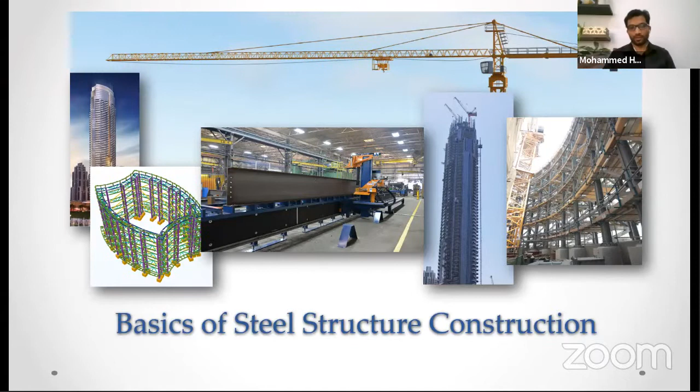You know what it is, steel, what steel structure is. Any steel structure which uses its structural components as steel to carry the loads, and for the structural stability, we call it a steel structure. You might have noticed many steel structures across.

Nowadays it's getting more popular because of its many advantages. The construction is very fast and it's prefabricated. Most of the steel structures are now prefabricated. All the structural elements are fabricated in a factory and taken to site and connected together. Because of that, the construction is very fast, the quality is good, and it has very less environmental impact. Because of all these things, the steel structure is getting more popular and more in use.

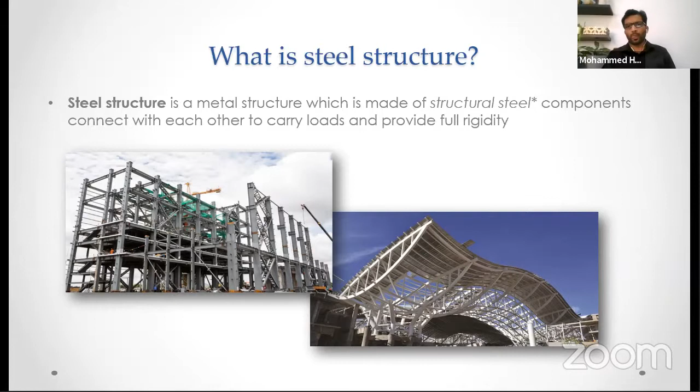When you see about steel structures, there are many applications. It is used in offshore structures for offshore towers, and it's used in onshore structures for many uses. In this session, we'll discuss the onshore structure construction.

Based on its application, it can be classified into industrial structures, tower crowns, bridges, hangars, warehouses, modular structures, and residential buildings. Tower crowns are those coming on top of the tower, which will be an architectural feature, and it will be used to cover the MEPs and other work items on top of the tower.

When you see bridges, hangars, warehouses, modular structures are very relevant to the current scenario. With this pandemic going on, modular structures are very widely used to build structures in a very fast manner. Modular hospitals are being made, modular quarantine camps are being fabricated, modular clinics, stuff like that.

Modular structures means those fabricated, assembled, everything will be ready at the factory and it will be taken to site and just placed in position. Because of that, when you need a very fast construction, modular structures are very common in use.

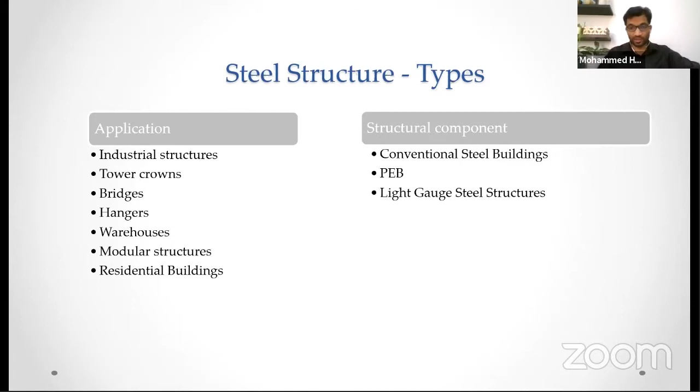Conventional steel buildings are those in which the structural members are made from standard sections. Each country has its own standard sections. In India, we have ISMB, ISMC; in America, there is W sections; in Europe, they use IPE, HEA, HEB; and in British standards, it's UB, UC sections - universal beam sections, universal column sections. These are a wide range of standard sections available in a particular market with specific dimensions, which remain the same wherever you get the structure or element.

So this way of construction is the conventional way, because it was used as a conventional way of structure where standard sections will be used.

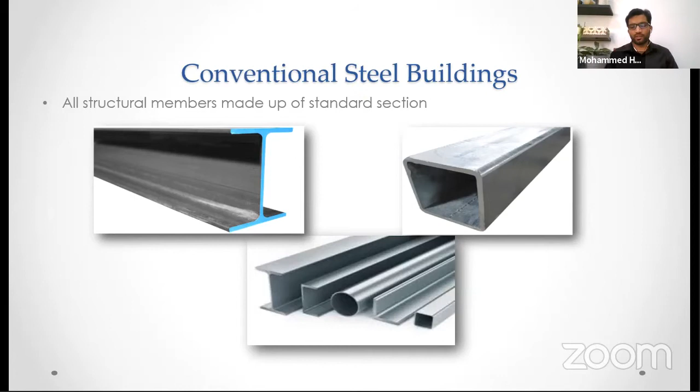In advance, there are pre-engineered buildings where built-up sections are used. Plates are welded together to form the required section. For example, if you need an I-section, plates are welded together to form the I-section. The advantage of this method is that you can use the steel thickness according to your requirement - you don't need extra steel.

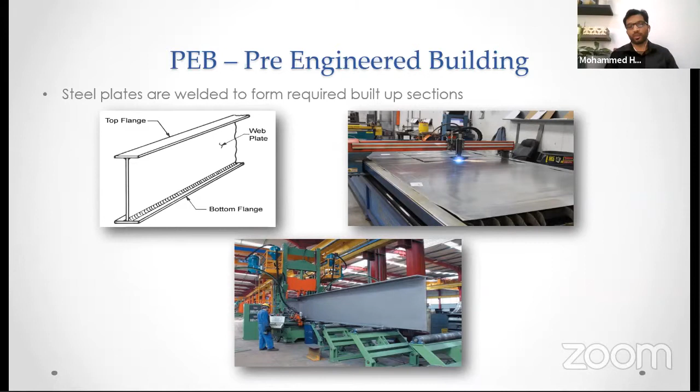This is relatively new when you compare with conventional structures. Here, the approach is that you do the analysis, see the stresses on the structure, and your profile, your section, will be shaped according to that.

So the advantage here is that you don't need to use more steel. For example, when you use a conventional steel structure, you'll have a straight member - the column will be a straight member. So you design the column for the moment here, and the same section is provided throughout, which results in more usage of steel.

But when you go for PEB, you design the structure based on the moment, and you can taper it to reduce the depth towards the supports. Also, when there is more shear, you can just increase the web thickness and make it safe.

You don't need all the members to be heavy. For example, here you'll have maximum shear force, and you need to increase the section thickness, the web thickness, in this area, and you can reduce it as you go towards the ridge. So that way you can reduce steel. This is an advanced method of construction where you can save a lot of steel. Compared to conventional steel, for a normal warehouse using the PEB method, you can save 20 to 30% of steel tonnage.

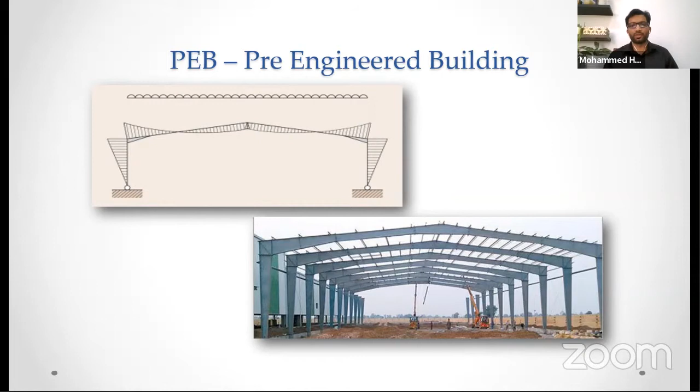The advantage of this is that it is very light. You don't need any machinery to erect this steel structure. Workers can take it by hand and fix it in place. So this is very convenient for small scale construction.

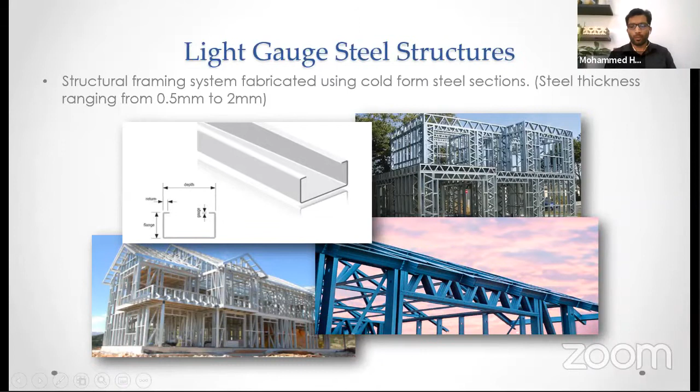So these are different types of steel structures. Now we'll see different phases of steel construction. As you all know, it starts with engineering. Once the engineering is done and all the details are ready, procurement will be done, the raw material will be procured, and production will be done according to the engineering details, and the produced items will be erected.

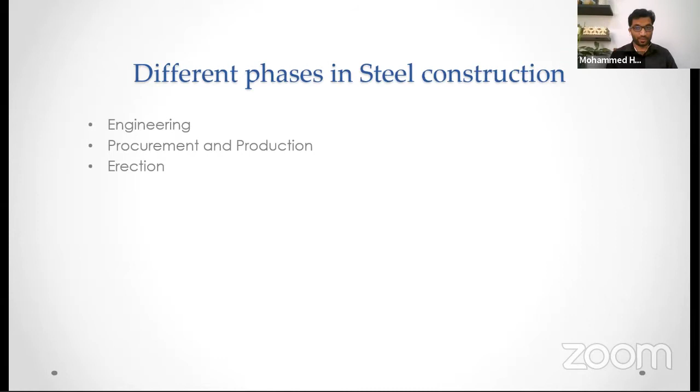In engineering, there are two stages: design stage and detailing stage. In the design stage, the structural framing system is finalized, the section sizes are finalized, the connection details are finalized, the anchor bolts and reactions are finalized. These things are finalized in the design stage. Once this is finalized, it is not sufficient for the factory to fabricate. For that, a detailing stage is carried out where 3D models are created and fabrication drawings are produced.

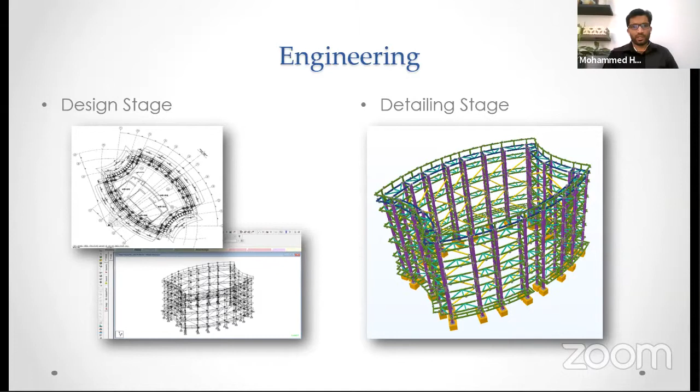In the design stage, the first thing is to make the structural system. Based on the architectural drawings received and the project specifications, the structural arrangements will be done. The columns will be placed in position, the structural members for stability will be arranged, and it will be designed for the given loads.

Here I've shown a simple warehouse building with a simple arrangement of structure. The main element in this structure is the main frame - you can see a main frame column and main frame rafter. This gives the stability of the structure in the lateral direction, and bracings are provided for longitudinal stability. You can see girts which connect from column to column - these girts fix and support the wall cladding. And you can see purlins which span from rafter to rafter, supporting the roof cladding and transferring the weight of the roof to the main structure. This is a general arrangement, and based on other requirements like doors, there will be door jambs and other secondary members provided based on the requirement and architectural features.

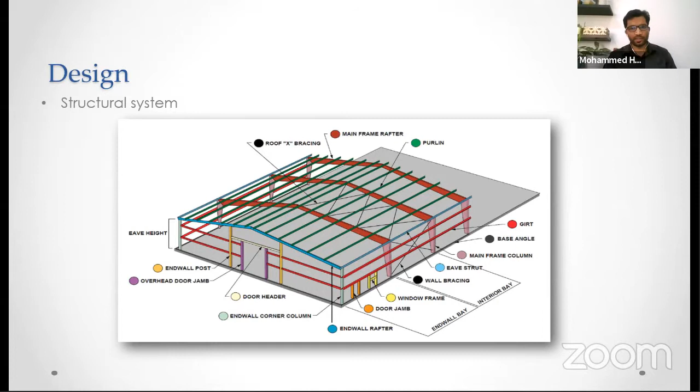So this is the first step. You will make the structural system, analyze the structural system, and then design the structural system for the loads and stresses on the system.

For design, there are different codes used across the world. Here in the Middle East, AISC 360 is used - it's an American standard for steel sections. It has two different methodologies: LRFD, which is similar to limit state design in the Indian code, and ASD, allowable stress design, which is similar to working stress design. In India, IS 800 is used, which is the code for steel design. In British standard, BS 5950 is used. AASHTO is also used for bridges and other highway-related structures - it's also an American standard. AISI is also an American standard, used specifically for light gauge steel structures.

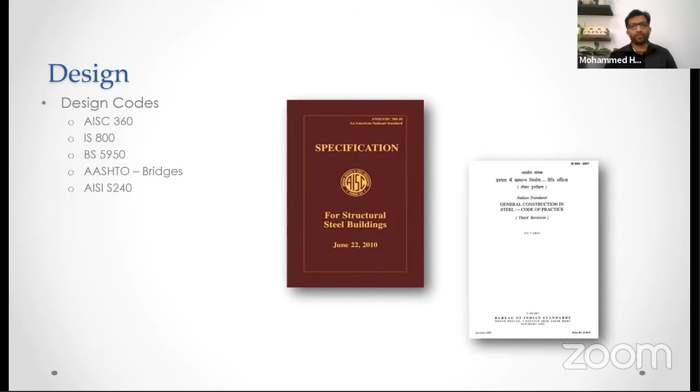So once you design the steel elements and finalize the steel sections, the next step is to design the connections. Connections are generally two types: bolted connections and welded connections. Now, most of these steel structures are prefabricated in factory and just connected at site. Because of this, bolted connections are most common.

This is to avoid site welding, because site welding will have quality issues. So most clients will ask to avoid site welding. Because of that, field connections will be bolted and factory connections will be welded. It's not 100% like that though. There will be changes based on site requirement and project requirement.

When you look at connections, you have to design the connections for each different structure's interconnections. And apart from that, the connections need to be arranged considering logistic limitations and lifting limitations.

For example, if you have a beam of 30 or 40 meters, you cannot fabricate it as one piece from the factory and ship it to the desired location, because you'll have problems in transportation. Your trailers or containers will not be that big, so you cannot transport a 30-meter long beam. Then you have to provide splices or connections in between. So these things need to be considered at the design stage, along with your lifting capacity.

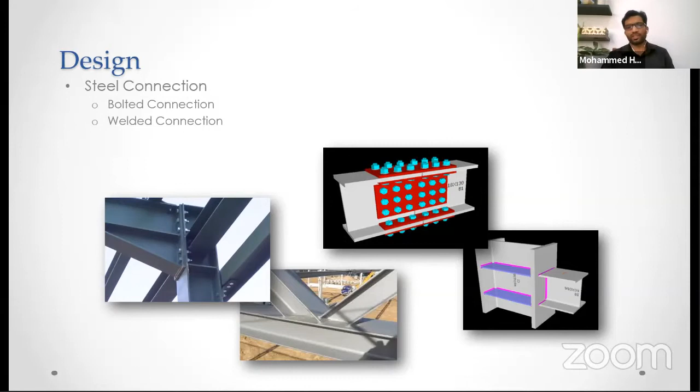MBS is maybe relatively new to all. It is specifically for PEB structures - metal building system, software used for warehouse buildings. It gives complete design - once you run MBS with all the inputs, it gives complete design of frames, purlins, bracings, everything. So it's a complete package design software, used mainly by all PEB companies.

And ETABS is generally used more for concrete structures, but it can also design steel structures. For connections, again there are many softwares: RAM Connection, Procon, Idea Statica, Limcon. These are few examples, and many big companies will have their own spreadsheets for connections.

So once you finalize the section arrangement, sections, and connection details, this gives full details about the structure. But that will not be sufficient for fabrication.

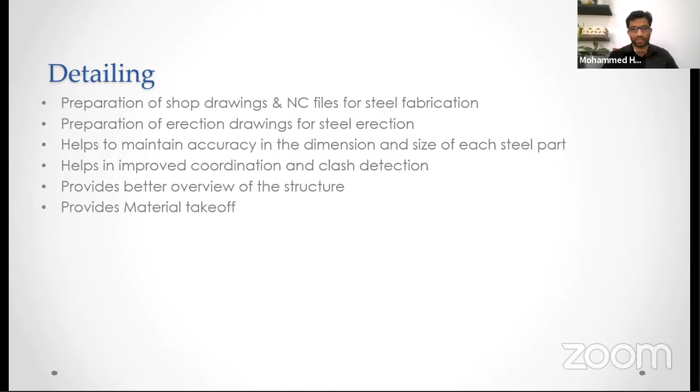I'll just show one 3D model - I'll share it to understand better, and we'll explain further with that 3D model.

This is one 3D model of a crown structure. As I told, you can see all the elements in this, all the bolts, everything is modeled to the actual. So it will resemble the actual building 100%.

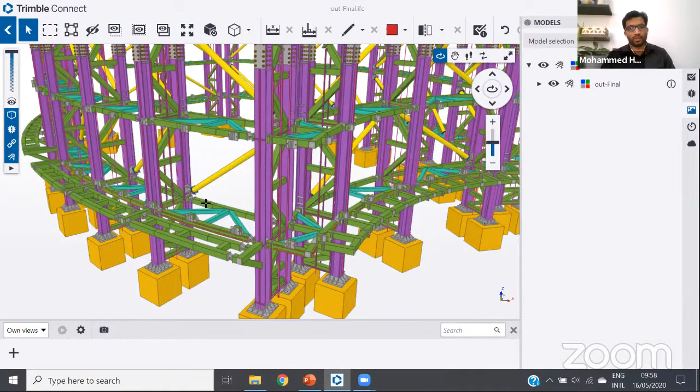And with this, you can use it with other contractors. For example, here you can see these brackets. These brackets are meant to support the cladding mullions. For the cladding, there will be mullions coming, and these brackets are to support the mullion. So once we give this model to the cladding contractor, he will put his mullions here. So he will understand that he has the supports at the correct position.

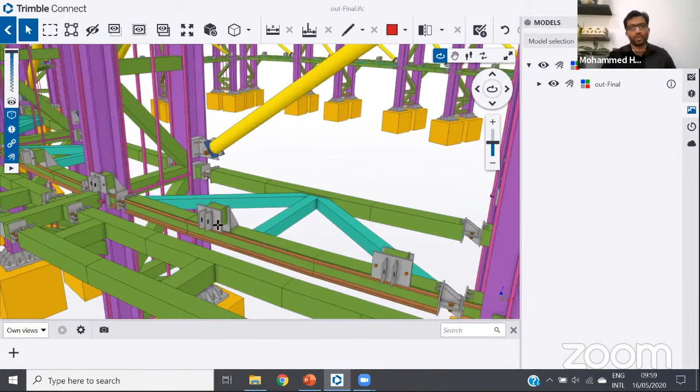For example, if his mullions are required at this position, he will cloud it and tell us we need to move this bracket to this location. So this type of coordination is possible with this approach. And you can see all the bolts, and we can even check the clash check with steel to steel members itself and with other trades. So that's the main advantage of the BIM approach.

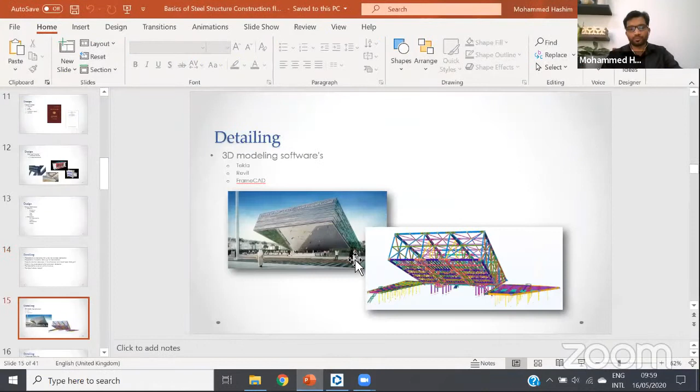So the complete building is modeled, and all the elements are modeled, and then shop drawings are created from this model. When you see shop drawings, there are two sets: one is single part drawings and the other is assembly drawings. Here you can see this is a single part drawing. From the model, I'll explain what is single part and what is assembly.

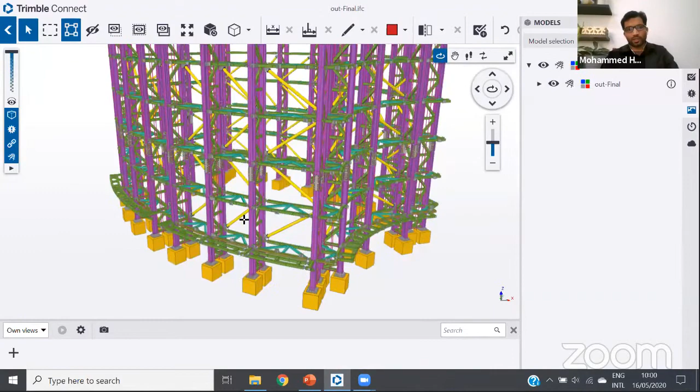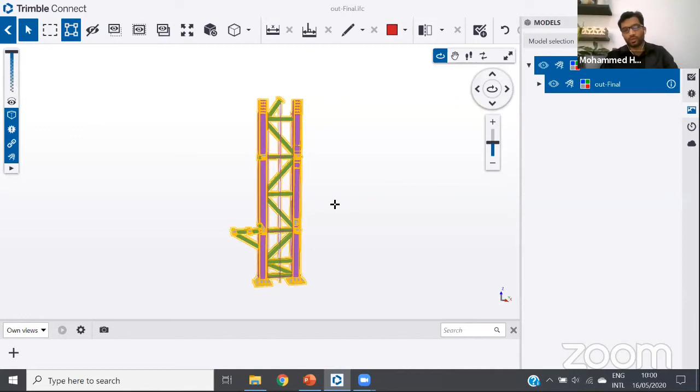For a structure, there will be thousands of members, thousands of elements. So here, if I select this, this is one assembly. This is connected to anchors, and here there is a splice provided. And when I take this one alone, this will be shipped from the factory as one piece. So it is called an assembly, which will be assembled together and shipped as one part to the site.

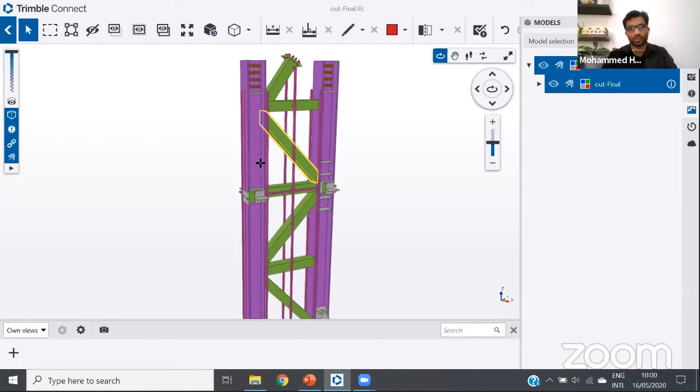Here, this assembly is formed by connecting many small elements, like this is one element, this is one element, this is one element, and this one is another element. So many elements are connected to form this assembly. So each element is called a single part. Here, if you see, when I click, you can see this is only selected. These plates are not selected.

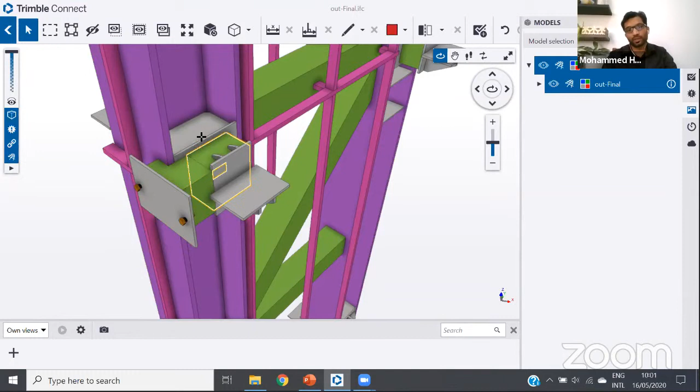Each plate is a different element, and it will have a different drawing as single part drawings. So two sets of drawings will be created. One is the single part drawing for this particular member alone. Likewise, there will be thousands of single part drawings, and then these single part drawings will be used to form the assembly.

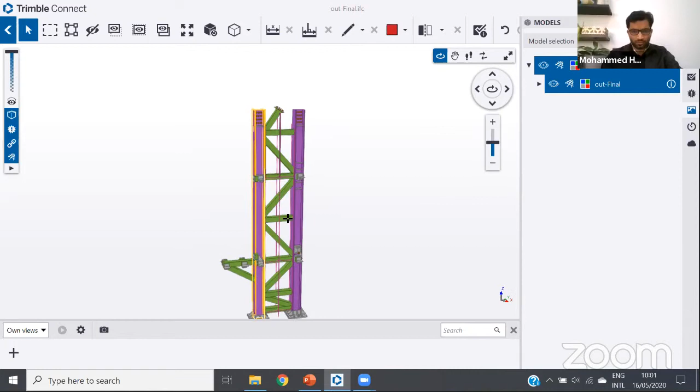Here, this is one single part. This is the member which I've shown here as a single part drawing. That will have a unique number.

The softwares which are now used for 3D modeling, there are many, like Tekla, Revit, and FrameCAD. FrameCAD is usually used for LGS structures. So there are many softwares for 3D modeling, and the most commonly used for steel structures is Tekla.

So when you model the Tekla structure, the software will identify the elements. If one particular element has the same dimensions and is repeating in many locations, it will give a specific number for that one, and this number will be shown in the drawings. And the same element, if it has an additional hole or something, it will have a different number. So a unique numbering system will be followed for every single part.

So if there are 1,000 single parts in a particular structure, it will have 1,000 numbers. If there are repeating elements in that structure, it will follow the same numbering. So these single part drawings will go to the factory, and they will cut the raw material based on the single part drawings.

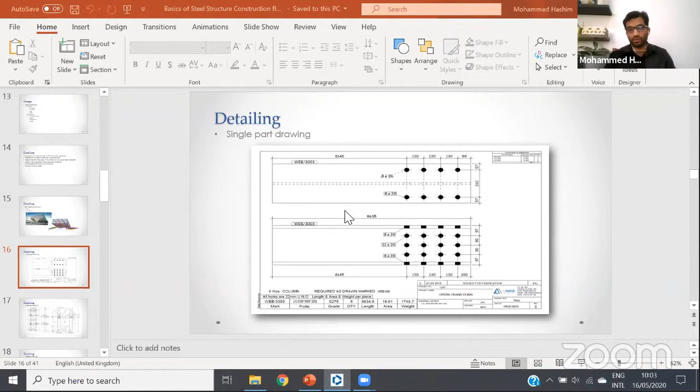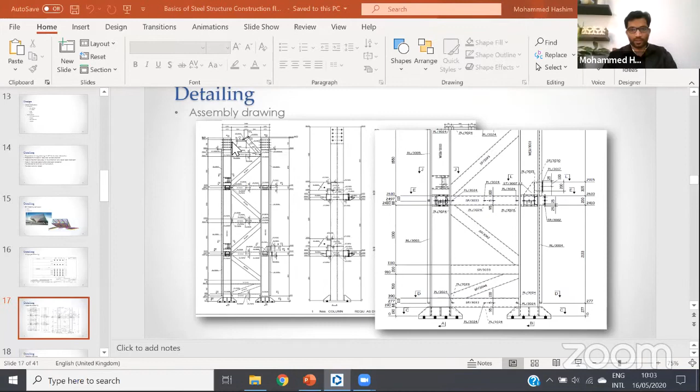Once all the single parts are ready, then comes the assembly drawings. Here you can see, I'll just zoom in, this number WEB/3003 — that's the same number which you have seen in single part drawings. So in assembly drawings, it will reflect the single part drawings and show how to fit the single parts. You can see here all the dimensions for fixing each item shown here. So this drawing will be used to make the assembly.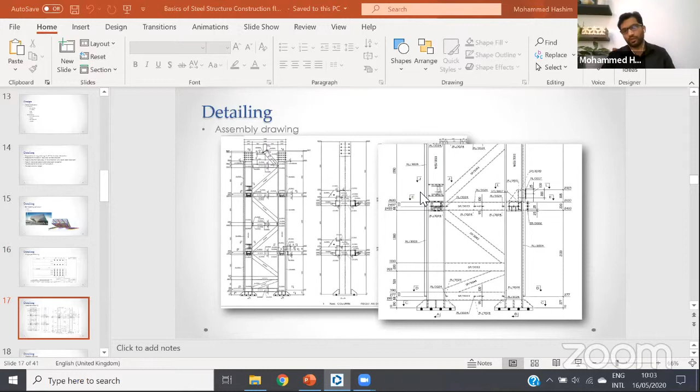Likewise, all the assemblies are created and it will give the complete structure elements.

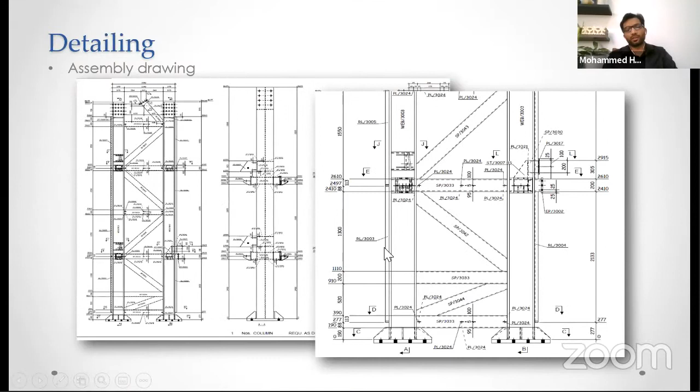Once the assembly drawings and single part drawings are done, it will be given to production for fabrication. Another output from detailing is erection drawings. You have the assembly drawings, you have the single part drawings, and the factory will fabricate the assembly based on your assembly drawings.

Each assembly will have a unique number. For single parts, there will be different assemblies. For example, this column assembly is one I've shown before. There's another assembly with a different number - this one is CL3 and this one is CL2. The difference is because there will be different plates connected; it may look similar, but there will be different locations of connection plates. So if there is any single change to an assembly, it will have a different numbering system. Two assemblies with different features will not have the same number.

This will help the erection team to place the members in the exact position, avoiding confusion and time wastage at erection. So these are the main three outputs from detailing: single part drawing, erection drawing, and assembly drawings.

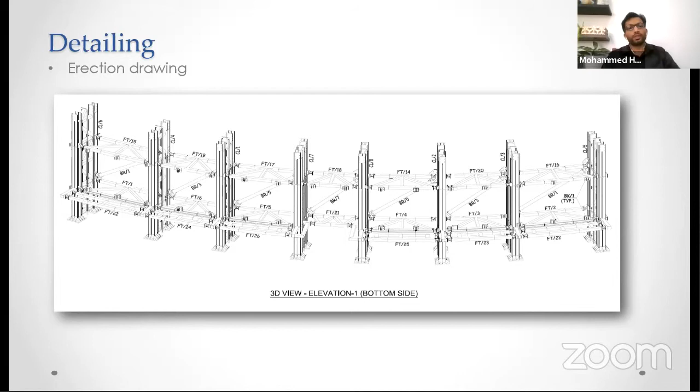And as I told you, you'll get a complete material list also. Once the material list is ready, the complete material takeoff will be given to the procurement team, and they will procure the steel material based on that.

The single part drawings, assembly drawings, and NC files are given to the production department. The NC files are computer numerically controlled files which give the details of single part drawings. As I said, single part drawings give the length of the element, and details of the holes or any notches, etc. This information is stored in the NC file.

When you give these NC files, they are used to prepare single parts. Most machines can read these NC files and use them to prepare the single parts. So these single parts will not be manually cut or manually drilled - it will all be done by machines.

In production, once all these drawings are ready and received, production will start. Production also has a set of stages. First is cut and drill single parts. Then after the single parts are ready, you assemble them to form the assembly element. This assembly element is treated and finished against any corrosion - corrosion protection is applied to the structure, and it will be shipped to the desired site location.

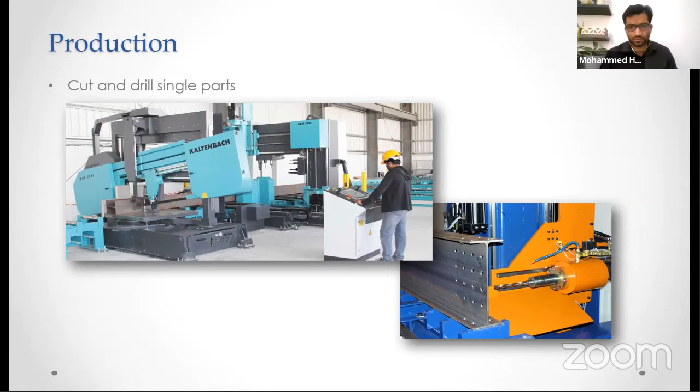This is another machine used for PEB members. As I told in the beginning, PEB members are built-up sections which use plates, and plates are welded together to form desired sections. In detailing, you'll have a single part drawing for each plate. These NC files for the plates are fed to the machine, and the machine will cut the plates based on the required shape. It can cut tapered sections, straight sections, and any notches or cuts automatically, and you'll get the plates ready.

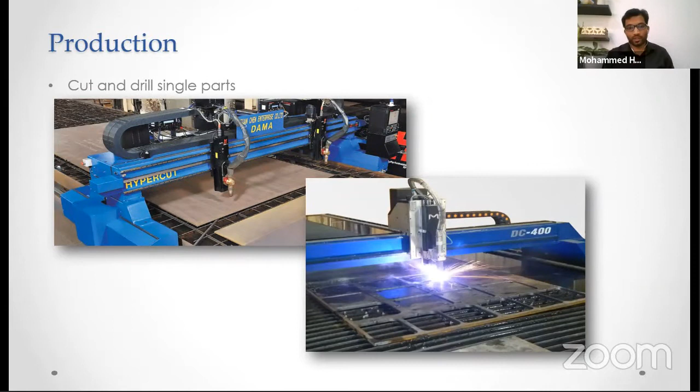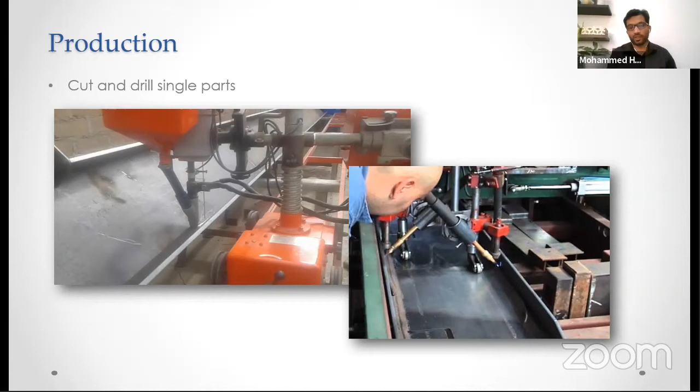Once the plates are ready, they are joined and welded to form the desired I-sections or box sections, whatever section you are using. These sections are welded again by machines. Here I've shown a continuous arc welding machine, which will weld the web with the flange, giving a continuous uniform weld throughout the section.

The machine you're seeing on screen is a FRAMECAD machine. For the LGS structures which we discussed, thin plates are used. These thin plates are fed to the machine, and with the NC files you provided, the machine will bend the profile as per your design, punch and drill the holes, punch the markings, and cut the members based on the design requirement. Normally the coils are loaded as a roll, so the machine will cut as per the requirement.

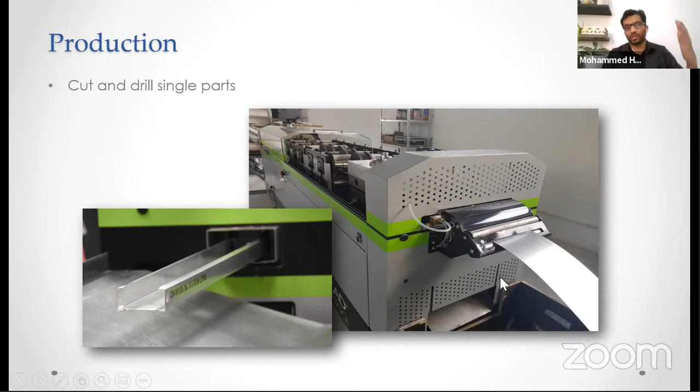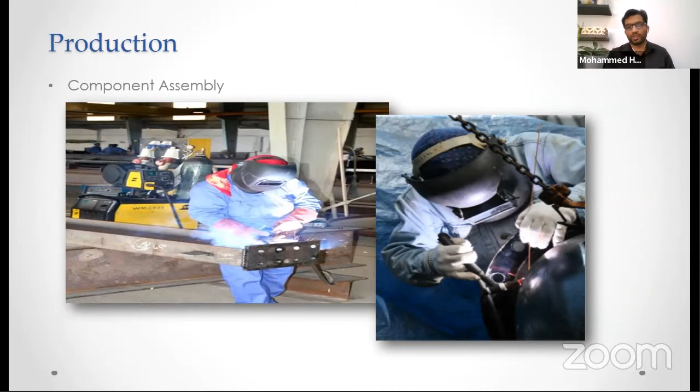So once all the assembly single parts are ready, the next stage is component assembly. Different single parts are joined together, welded together to get the assemblies. Qualified welders are used for this process, and each welder will be certified to work. For LGS, there is no welding involved.

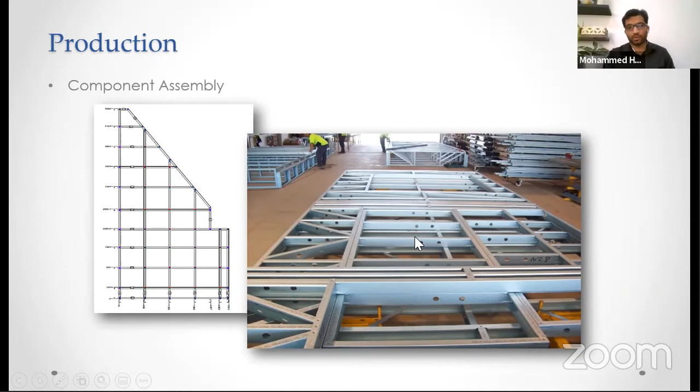The single parts we get, each channel or Z section, are screwed or bolted together to form the panels or trusses required. Once the assembly is ready, it has to be treated. The surface will be having rust and impurities. This will be treated, primer is applied, and final finish is applied to the structure.

Final finish depends on client requirements and environmental conditions. If the structure is exposed to harsh environment, a higher level of corrosion protection may be required. There are different corrosion protection systems: epoxy coating, hot dip galvanizing, fireproof protection. Fireproof protection is not just corrosion protection, it protects the structure from fire also.

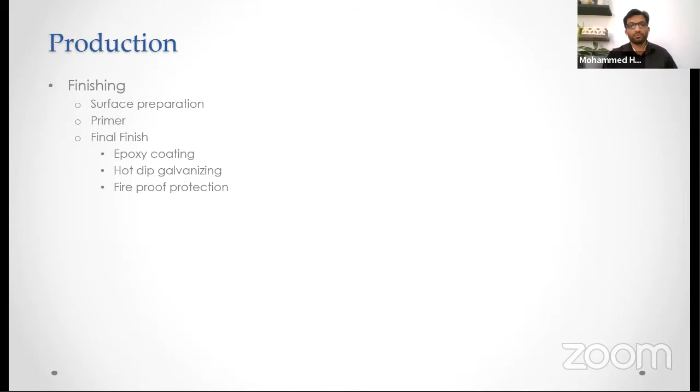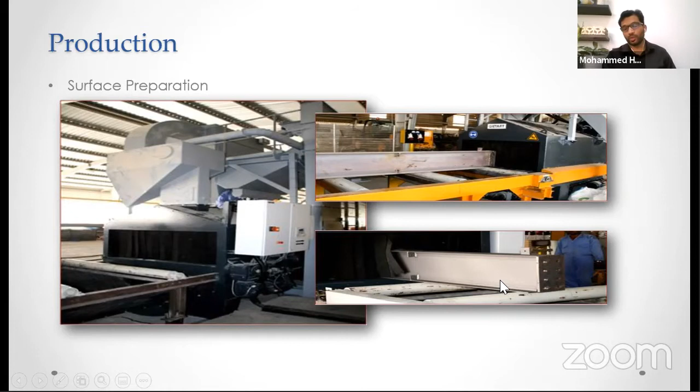Different paint systems are used, different thicknesses based on the requirement. There will be client requirements, and environmental requirements based on the exposure condition of the steel structure. The paint thickness is monitored by quality engineers, who check whether it is adequate.

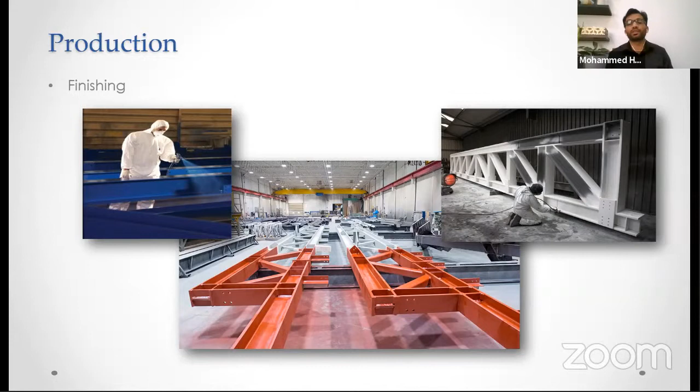In some cases, the client will ask for hot dip galvanizing if the structure is exposed or open to moisture, then it will be recommended for hot dip galvanizing. In this process, the whole structure is dipped in hot zinc, and the zinc gets coated on top of the steel structure. This protects the steel members from contact with the environment with a zinc coating, and this is called hot dip galvanizing.

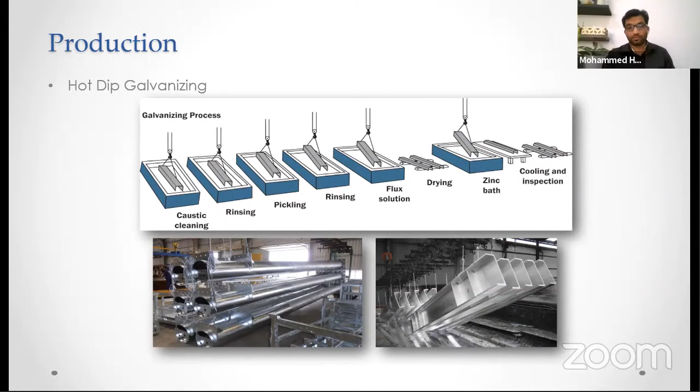Another painting system is fireproof painting. Even though I've shown this slide in production, it is actually done at the site, because this painting system is for protection from fire. This specific paint should cover all the steel structure and should not leave a gap for fire to enter and contact steel elements. For this reason, these paints are done at site once all the structure is erected and in place.

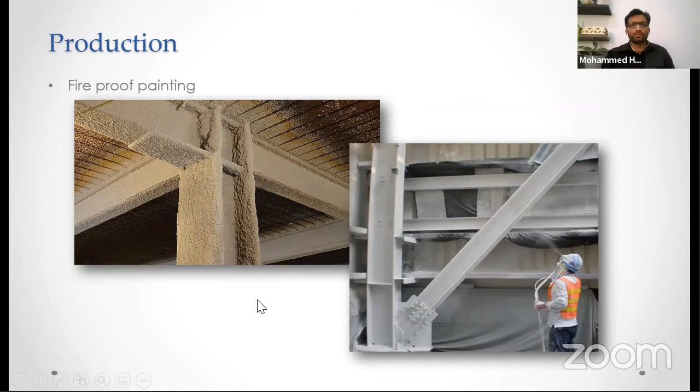So once the elements are ready and finished, the next stage is packing and shipping. If you have a project within your country, nearby, land transportation is chosen, or if you are shipping to different countries - here in Middle East, we are doing many projects in Africa and Asia - we'll be having a lot of structures shipped outside the countries. So containers will be used, which will be loaded onto the ships.

Here, the important thing is that you have to plan the shipping very precisely. Otherwise, you will waste your money and damage the steel structure. It should be packed properly so that the plates or members do not bend, so it does not affect the quality of the structure or damage the finish system on it. Another thing is you should have optimum packing to minimize your cost.

This is the reason I mentioned before, when you design the connection, you should be aware of the length limitations and weight limitations on transportation. Normally the containers for shipment will be 12 meters long. So if you have a beam more than 12 meters long, you'll face difficulty in shipment. The member length and assembly length size should be adjusted for the shipping limitations.

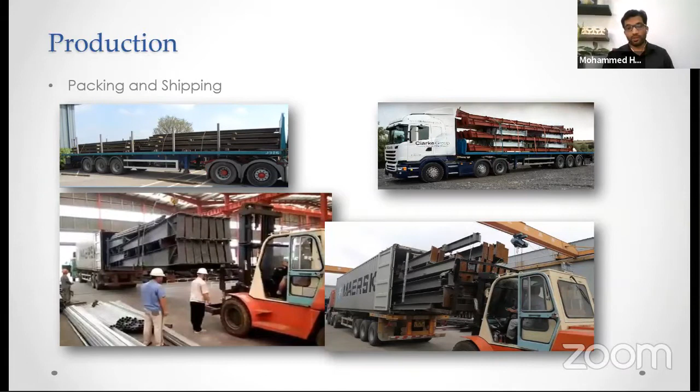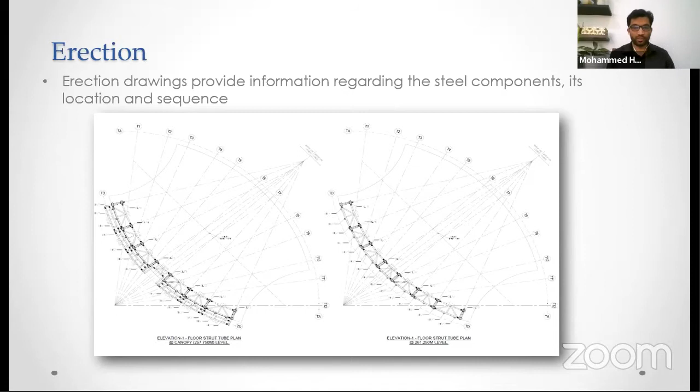Once the steel members are shipped, the next stage is erection. As we discussed in the detailing stage, we prepare the erection drawings. These erection drawings give complete information for the steel components, the assembly numbers, the location of each assembly, and the sequence of erection. These drawings will be used by the erection team at site.

When you consider erection, there are some points which have to be taken care of: the site condition, safety of employees, erection sequence, material storage, and erection equipments.

Site condition means most steel structures are erected on top of concrete foundations, sometimes on top of a high-rise building. So you should be aware that the site is ready to receive the steel and there is proper access to site. Otherwise you will face storage problems - material will arrive before the site is ready, you won't get a proper place to store it, and it will get damaged or rusted. So these things should be planned and controlled.

Safety of employees is very important because most workers are working at height, so proper safety measures should be in place. For erection sequence, structural stability should be maintained throughout the erection, so the sequence should be planned to achieve this stability throughout the process.

Material storage is also very important. Once you ship the whole steel members, sometimes based on the site condition you cannot store them - for example, if you are doing a steel structure in an urban area where storage space is very limited. The tower crane model we discussed is situated in a very crowded portion of Dubai, where storage space was very limited. In that condition, we have to sequence the delivery of material and erection in parallel, so the erection team should have a plan for which elements and assemblies will be erected as they are shipped.

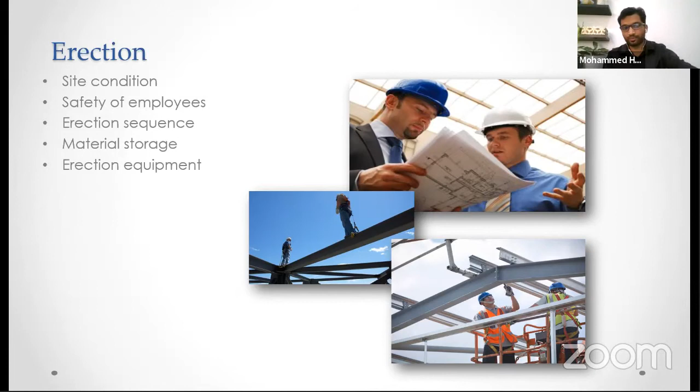The first thing in erection is anchor bolts. You fix the anchor bolts based on the anchor bolt drawings, which show the exact location of the anchors, their size, and their spacing. According to these drawings, anchor bolts are placed, and you have to take great care about their location, otherwise the structure will not fit together.

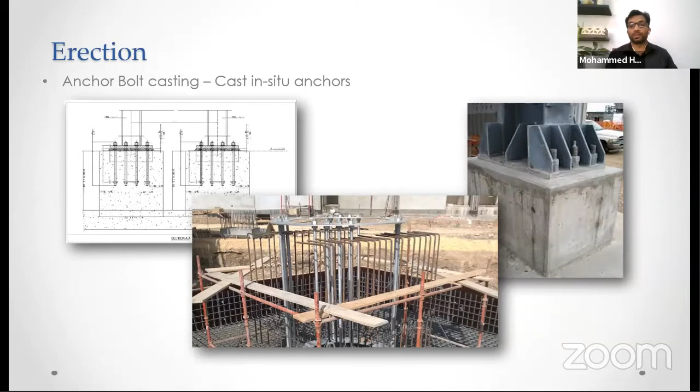You should maintain proper spacing between the anchors and maintain the critical dimensions between two anchor bolts, because if you deviate from that, the columns will be placed in the wrong position and the beams or other lateral elements coming in will not fit together. This is a very important stage in erection.

Erection sequence: the erection team should be well aware of the structure and should know how stability should be achieved throughout the erection. Otherwise, even though the structure as a whole is safe, if the erection is done improperly, there is a chance the columns will fall down, members will buckle, and this leads to failure of the structure. So you should have a proper erection sequence.

Once the main structural elements are erected, the last priority comes for secondary elements like end wall columns and other secondary beams, etc.

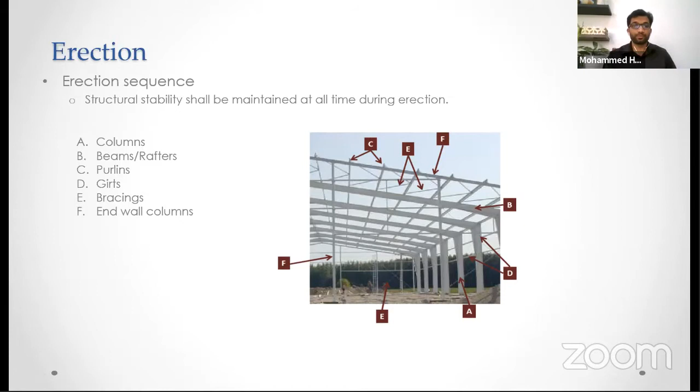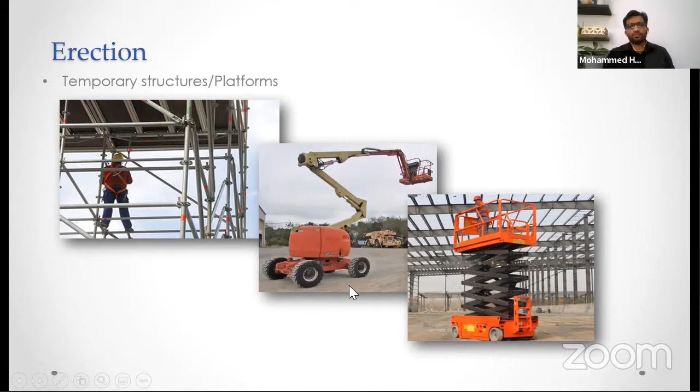Erection equipment is very important. Based on site conditions and member sizes, you have to choose your erection equipment very wisely. Otherwise, you will fail at site.

Once you complete the modeling, Tekla or any other model will give the exact weight of each assembly, so you'll be aware of the maximum weight of the assembly in your structure. Accordingly, you have to choose the lift cranes and also consider the accessibility of the cranes. If the crane cannot reach close to the structure, its lifting capacity will reduce. So these things need to be considered.

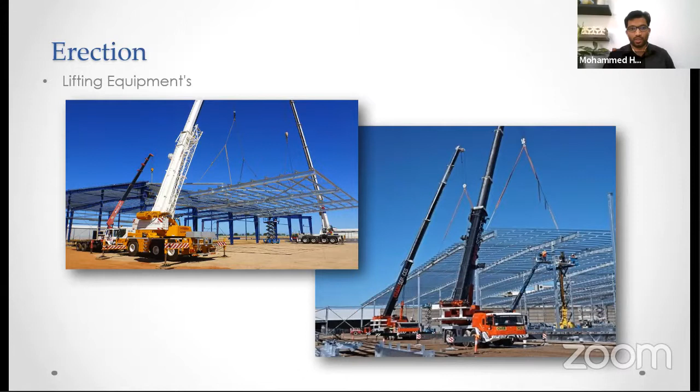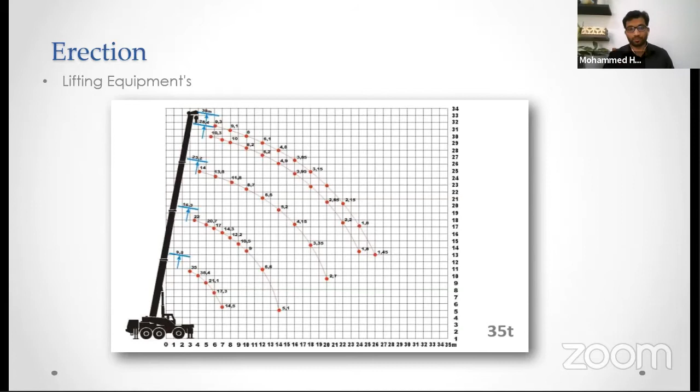What we need to think about is taking care at the detailing stage. You should know the tower crane capacity and the assembly weight—each assembly weight should be limited to the crane capacity. So we have to think in both ways. If the crane is fixed at site with a certain capacity, you have to limit your assembly weight accordingly. And if you have flexibility to change cranes, you have to choose the crane to match the maximum weight of the assembly.

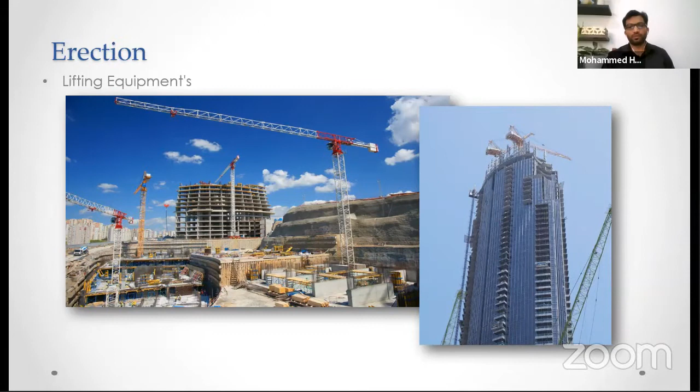Thank you. Thank you very much.

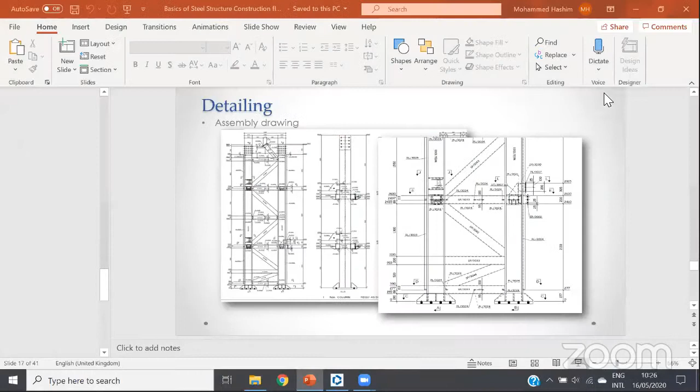The first question is from Tausif Kauswala, an assistant professor at A.D. Patel Institute of Technology in Gujarat. He's asking, while designing an RCC structure in STAAD Pro and in ETABS, why does STAAD Pro always give higher steel?

It is not like that, actually. From my experience, I experience the other way—whenever I do the design in ETABS and STAAD Pro, I get lesser steel in STAAD Pro. So I don't know why he got the other way. Because of that reason, most companies are not using ETABS for steel design. As I explained in my slide, STAAD Pro is preferred over ETABS for steel design. Concrete is the other way, but for steel design, most companies choose ETABS... I mean STAAD Pro. It's its own approach—the programs are developed with certain formulations, approach, design assumptions, and design checks at particular points. So it depends on where the software checks the design. In my experience, STAAD Pro gives much lesser steel compared to ETABS.

All right, the next question is from Nandkishore Chowgle from MPCOE Ratnagiri. He's asking, as compared to IS code, is there any highlighted issue while designing with other standards?